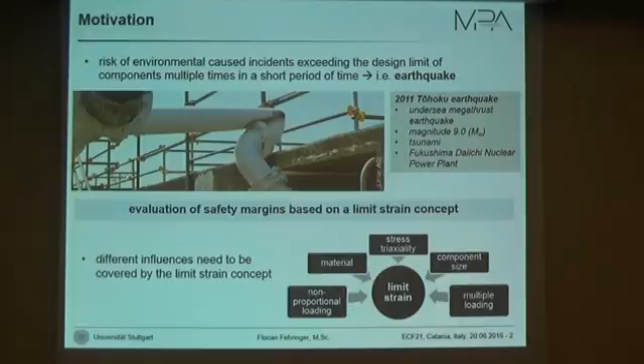So the content of my presentation: I already showed a short motivation. Then I will show a possible strain-based safety assessment concept. I will talk about the damage mechanics simulations we need for the strain concept, and then I will show some experimental numerical investigations we did so far. I will show a fracture strain curve we derived from that experimental investigations, and I will show in an outlook the future planned experimental and numerical work.

Our strain-based safety assessment concept is based on such a limit strain curve, which gives us a tolerable accumulated equivalent plastic strain as a function of different parameters like the stress triaxiality, Lode angle, component size, load histories, and so on. And of course, our limit strain curve must contain a safety factor.

So how do we get those limit strain curves? We do a kind of material characterization, so we do some specimen tests, which on one hand directly influence our limit strain curve, and more important, are needed for our finite element simulations.

We do 2 kinds of simulations: some simple elastic plastic simulations for things like the plastic strain or the stress triaxiality and so on, and some damage mechanics simulations which we need for the crack initiation location and the crack initiation time.

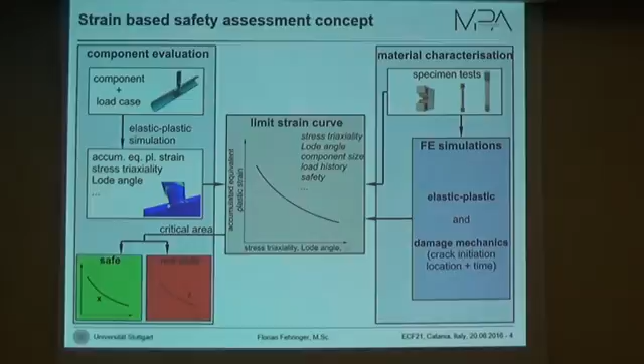So the damage mechanics simulations: we are using the local damage mechanics model of Rousselier. The Rousselier model is for ductile failure under tensile load. And ductile failure under tensile load can be described by 3 different stages. First we have void initiation for the material we are looking at.

This happens as soon as our equivalent stress reaches the yield strength. After void initiation, we have a growth of the voids, which is described by the Rousselier model. The Rousselier model is strongly dependent on the hydrostatic stress. And at the end, when the void volume reaches the critical value, we have a coalescence of the voids, which finally leads to the fracture of the specimen.

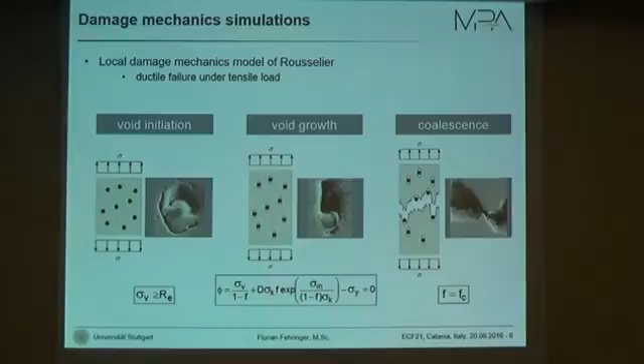So the problem is, the Rousselier model is not capable of describing shear dominated failures, so small stress triaxialities, and multiple loading situations, because it's missing a kinematic hardening term.

So in our work we have to do at least two extensions. First, to describe shear dominated failure, we are looking for a coupled approach by introducing a new damage parameter describing the shear damage and adding a term describing the shear behavior, which will depend on the Lode angle parameter.

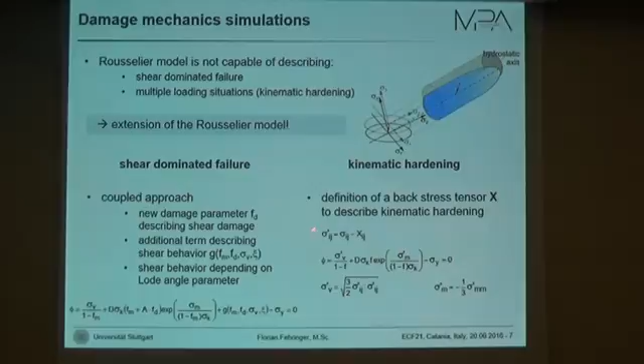For kinematic hardening, we will define a backstress tensor which describes the kinematic hardening effects and which will influence our stress tensor, which we use for our Rousselier model.

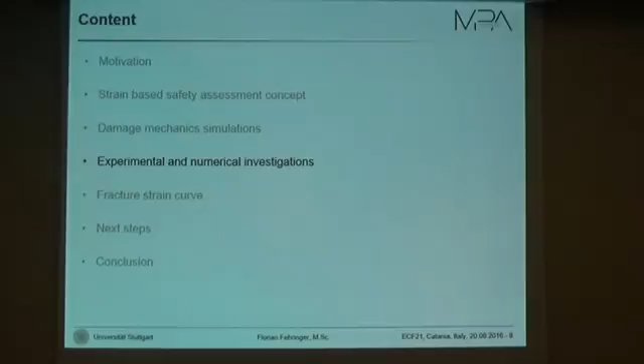So the experimental and numerical investigations we did so far. First of all, what's the material we're using? We're using a ferritic steel, representative for German nuclear power plants. We take all our samples out from a pipe, which has an outer diameter of 800 millimeters and a wall thickness of 47 millimeters.

First of all, to describe the homogeneity of the material, we did 15 uniaxial tension tests. We distributed the specimens around the circumference, and we took specimens in longitudinal and circumferential direction. As you can see, we have a quite good homogeneity of the material, which is kind of important for our concept.

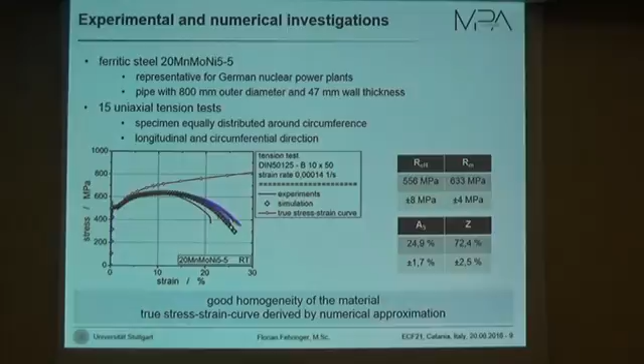We also used those tension test results to derive our true stress strain curve, which we also need for the Rousselier model simulation.

Second step is the numerical calibration of the Rousselier parameters. So we used notch-round tensile bars with in total 3 different notch radii: a 10 millimeter notch radius, a 4 millimeter notch radius, and a 2 millimeter notch radius. And as you can see with the Rousselier parameters down here, we are very well able to describe not only the elastic plastic behavior of the material, but also the crack initiation and also the failure behavior.

You can see on the left, the load displacement behavior for elongation of the specimen; on the right-hand side we have the load necking for the reduction of diameter in the notch.

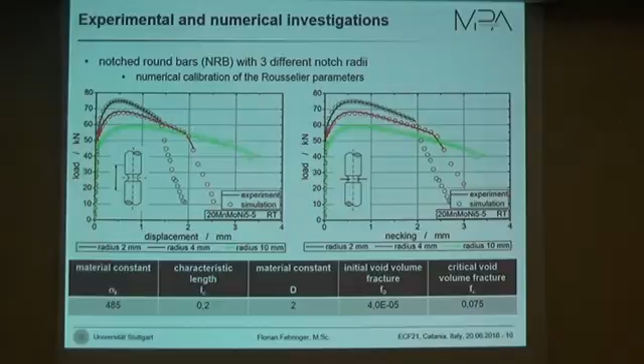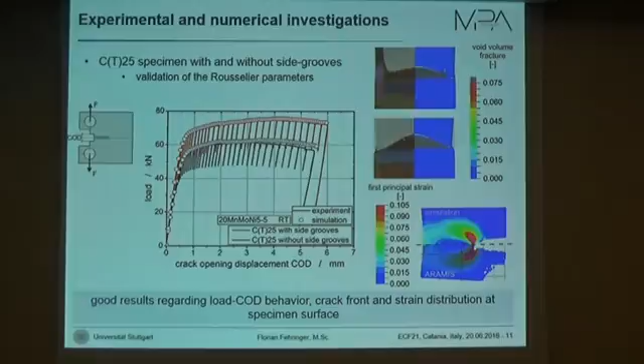As I already said at the beginning, the loading path might have an influence on limit strain, so we did first tests on the influence of loading paths with a two-step test where we changed the stress triaxiality during the test. We first had simple smooth round bars which we pre-strained to a total strain of 4, respectively 8%. Afterwards, we took those specimens back to the workshop, added the notch, and increased the stress triaxiality.

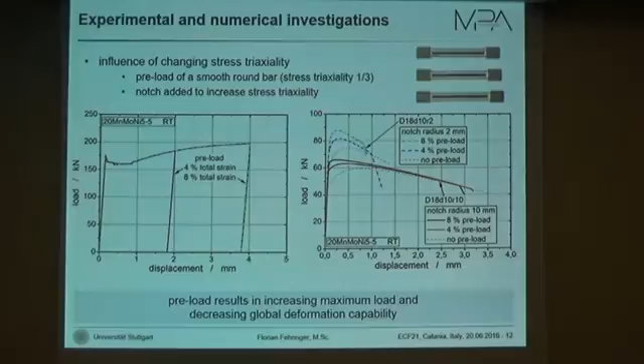So the question now is: is the Rousselier model capable of describing such a situation with changing triaxiality and changing geometry? Same as for the experimental procedure, we did a two-step simulation. We first pre-strained a smooth bar, and after 4, respectively 8% total strain, with an element death option, we changed the geometry to a notch geometry and continued with the simulation.

On the right diagram you can see, as one example, the 2mm notch radius, 4% pre-strained specimen in blue, and you can see the load-displacement behavior and the crack initiation time could be described very well by the Rousselier model.

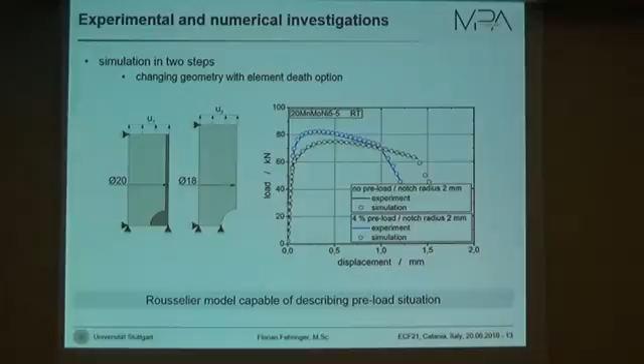All the experiments I showed before we used to derive a fracture strain curve. Why is it a fracture strain curve and not a limit strain curve? Because it only contains stress triaxiality, and much more importantly, it doesn't contain any safety factors. The fracture strain curve shows us the accumulated efficient equivalent plastic strain and crack initiation as a function of the stress triaxiality.

As you can see, for high stress triaxiality values, we can fit the curve with a decreasing deformation capability with an increasing stress triaxiality. We also took our results from the preloaded specimens to look into the influence of changing stress triaxiality and limit strain. You can see here the specimen with a 10mm notch radius, which has a smaller stress triaxiality, and there's hardly any influence of the preload regarding the fracture strain. For the 2mm notch radius specimen, we have, with an increasing preload and increasing pre-strain, a reduction in the tolerable plastic strain and a slight increase in the stress triaxiality.

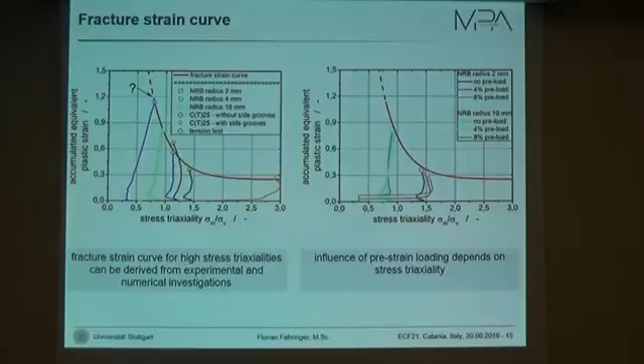As the project is right at its beginning, I'll give you a short overview of what we are planning to do to extend our limit strain concept. First of all, we're going to apply it to a second material, not a ferritic steel but an austenitic steel instead. And we are also looking into size effects.

We'll do a set of experiments with notched round bars in totally different sizes, but all the same stress triaxiality, as you can see in this picture. The Rousselier model already predicts a slight reduction in limit strain regarding the size, but we have to prove it with experiments first to be sure.

We are also looking into the influence of mixed mode loading via compact tension shear specimens. Those are specimens like that. They consist of a regular CT15 specimen, and by the specific clamping we can generate a mode 1 loading for loading angles of 0 degrees, and a mode 2 loading if we turn it 90 degrees. For 30 and 60 degrees, of course, we have a kind of mixed mode in between mode 1 and mode 2.

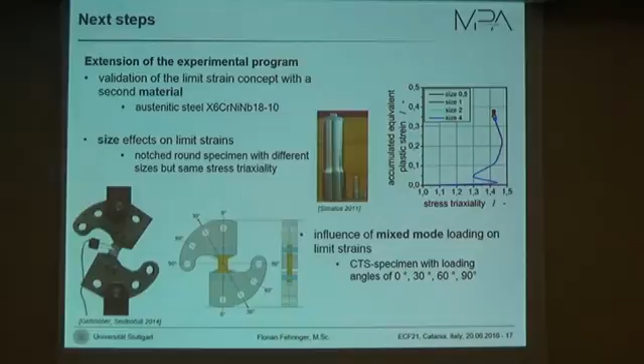For the loading path influences, in addition to the pre-strained notch bars, we have tension-torsion and torsion-tension specimens, which we will load also in two steps, not simultaneously. And we have notched hollow cylinders under pressure and tensional load, which we will apply pressure and afterwards tensional load to see the influence on the changing stress triaxiality.

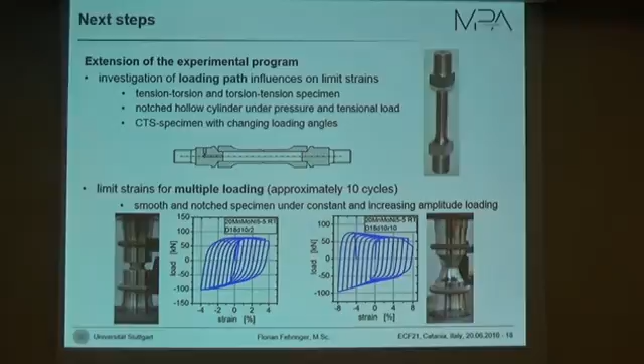The CTS specimens, the compact tension shear specimens I showed in the previous slide, we will also use in two-step tests, changing the loading angle at least once during the experiment. For multiple loading situations, we do some cyclic testing with approximately 10 cycles till failure, using smooth and notched specimens, and we will apply constant amplitude loading and increasing amplitude loading for both types of specimens.

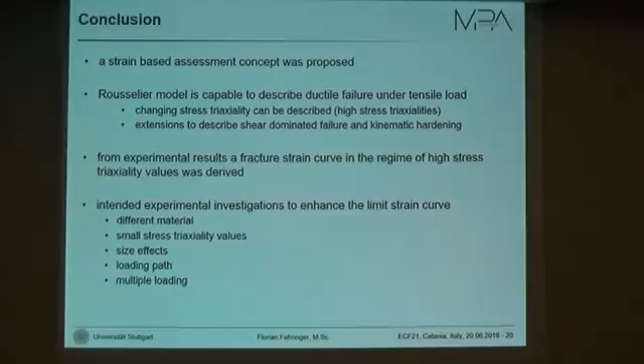So the conclusion: at first I showed a possible strain-based safety assessment concept, and then I showed the capability of the Rousselier model, which is able to describe material behavior for high and changing stress triaxialities, but which needs some extensions to describe shear-dominated failure and kinematic hardening behavior. A fracture strain curve we could derive from the experimental results in the regime of high stress triaxialities. And on the last two slides, I showed our intended experimental investigations to enhance our limit strain curves with influences like material, stress triaxiality, size effects, loading paths, and multiple loading situations.